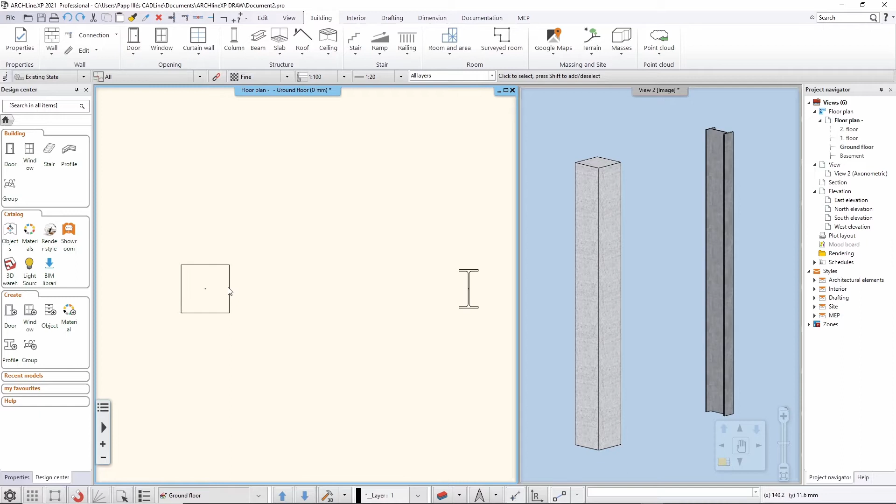All you need to do is select the column you would like to add this insulation onto the surface of, and then click this option which tells you that you can apply an insulation. By default, the software will apply a 10 centimeter, or 100 millimeter, thick insulation, which you can easily customize. You can change it to, say, 50, and then you can also change the insulation material.

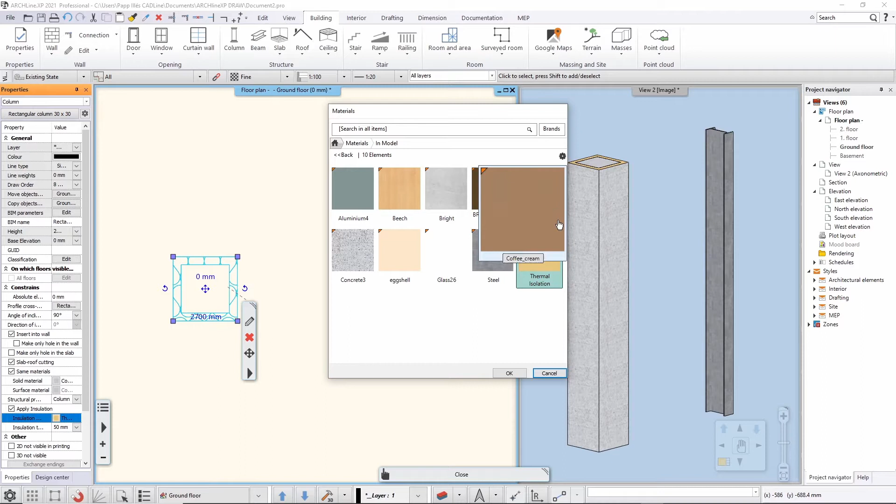But by default, it's the material called thermal isolation here. You can go to the libraries, or you can even create your own material defining a different one. By default, this is how it works with a rectangular profile.

It's even more interesting perhaps how it works with a specific profile like an I-profile here. If you select that and do the same thing, applying this setting to this item, in case it didn't appear, it's because the coating is too thick. You can disable that, or change the thickness to something else that will work with this one. For example, in this case, I need to reduce the thickness to something like 20 or 30 millimeters.

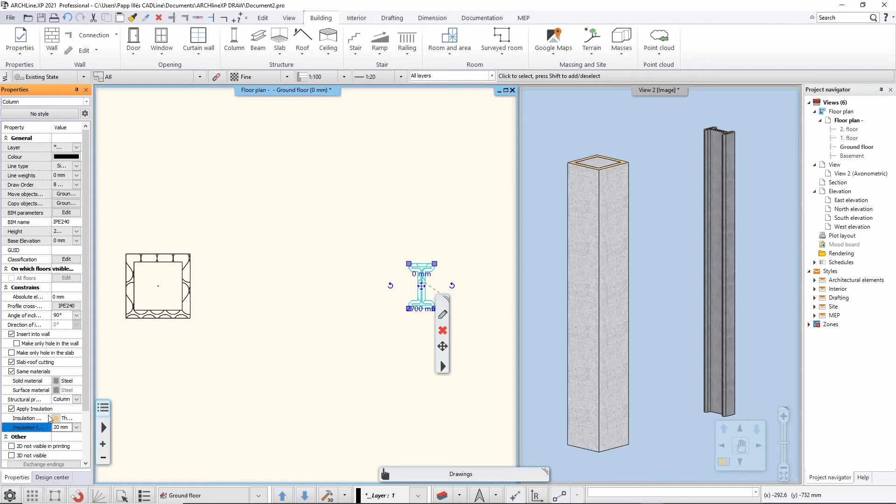When I hit enter, now the software will add this extra layer of coating here. I still have the option to decide what sort of surface I would like to see outside this item, but it's definitely coated with this material, the thermal isolation.

So this could be of use for two different things. In case of internal items, having some sort of piping or something that needs to be protected with thermal insulation inside a hollow tube or column, you can just apply that easily over a rectangular profile or a circular profile.

Or if this is something like fire protection that is sprayed as a foam coating on the steel structure, you can also use that setting with different defaults or different material settings. But actually, this is how it goes: you just enable this option and then decide the material and the thickness.